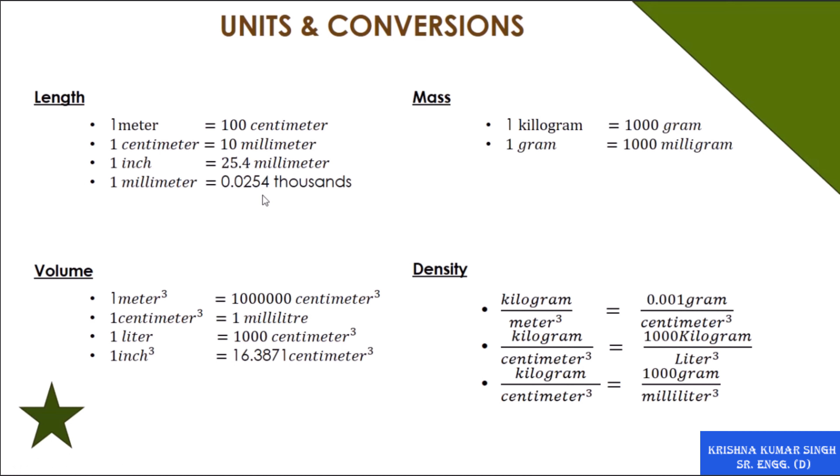These are the base of every industry, but all the other formulas, like pressure, temperature, volume, force, are dependent upon the industry you are choosing, the field you are entering. In the sheet metal industry you will find formulas like bend allowance. If you are entering the casting industry you will find contraction allowance and all the different formulas.

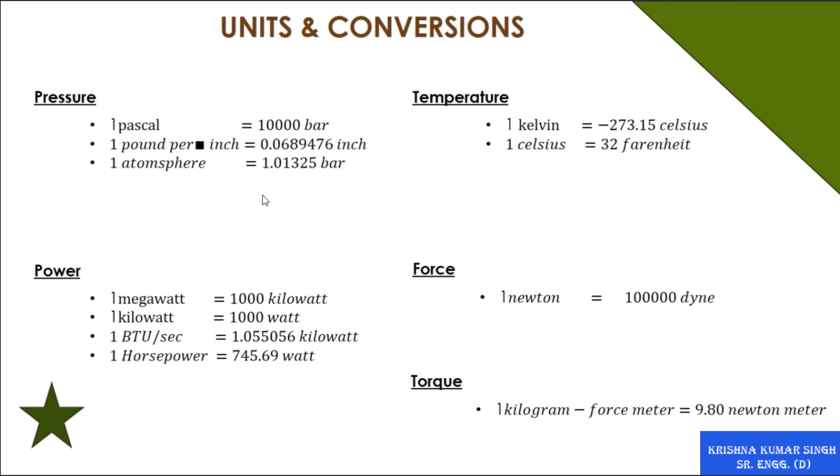So in short, what I mean to say here is that you need to learn the basic formulas first, and then you will need to learn other formulas depending upon the industry you are entering, and these formulas should be accurate. You can see the formulas and their conversions.

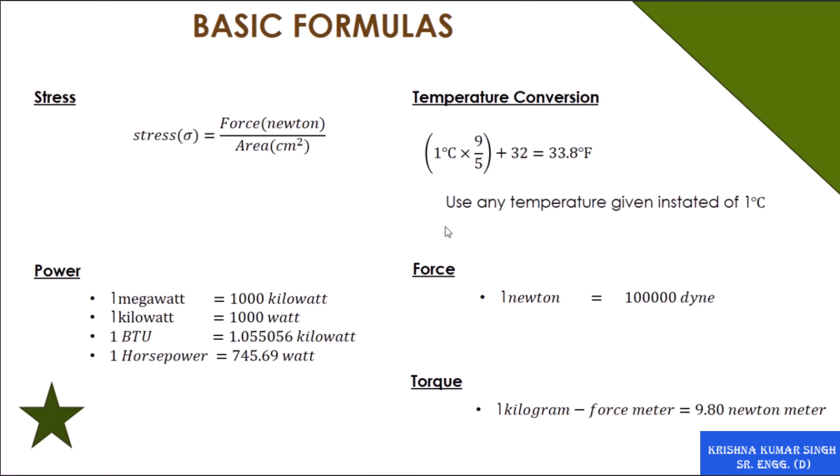Power is needed only when you're entering the machine design branch or you are entering equipment planning. These kinds of numbers you need only when you are entering equipment planning and design. So you need to learn them according to the requirement of your industry.

So let's start with the measuring instruments. First we have the vernier caliper; here it's an analog caliper and already we are using digital. It is used to measure depth, diameters, internal diameters, distance, center distance. And here you can see the least count, but it may be 0.2 depending on the division.

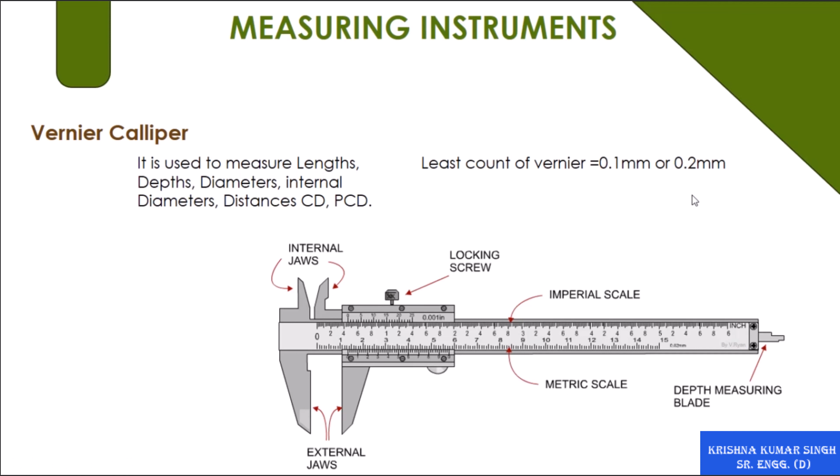If there are more divisions then the least count will be smaller. Actually, as a mechanical designer you need to know the complete use of these instruments and also everything about these instruments. Next we have the micrometer.

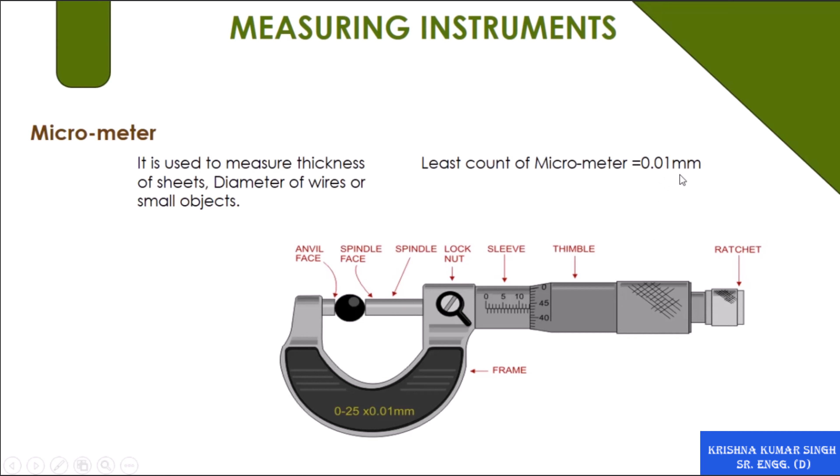We use it to measure the thickness of sheets and gauges and the diameter of small objects. Again the least count is 0.01. If there are divisions, now we can see that there are only 50 divisions. That means 0.01 is the least count.

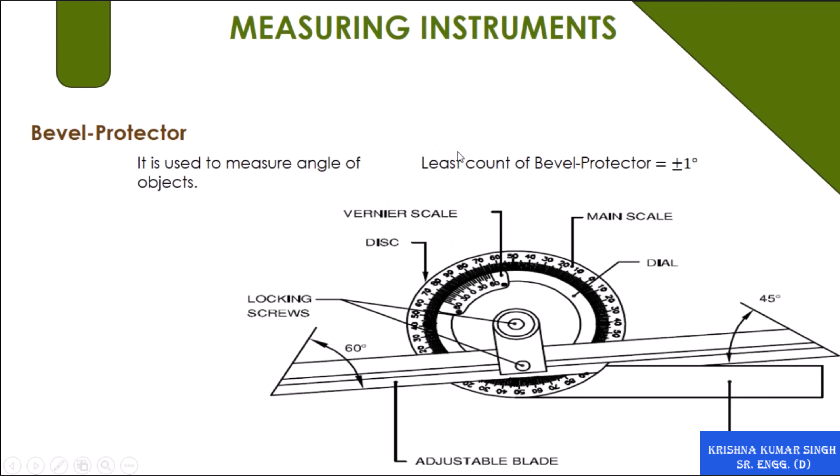You can see the bevel protractor, used for measuring the angle between two surfaces. Least count is less applicable here because it is negligible. The height gauge is very similar to the vernier caliper, but it acts in the vertical direction, so we can measure the distance, the diameter, the spherical radius and the height of the object.

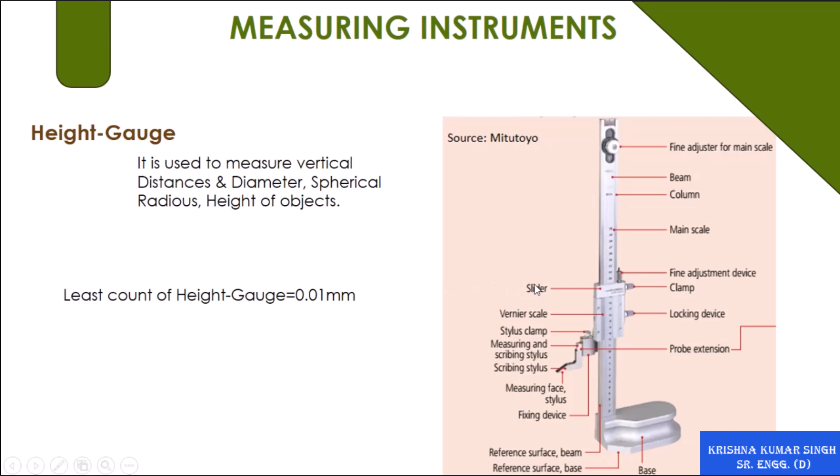Here again we see the depth gauge, which is again very similar to the caliper, and the least count is also very similar. This is the dial gauge. It is mostly used for measuring the roughness of surfaces and for checking, but it has another application. I will teach you how it is used in measuring cylindricity, flatness and circularity.

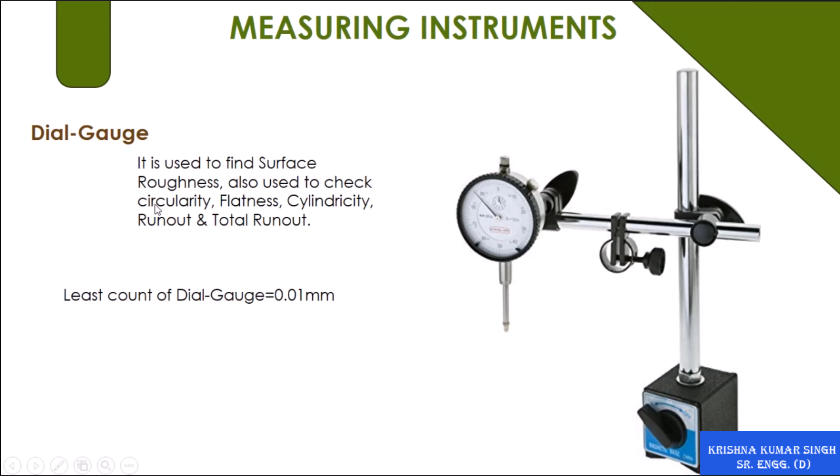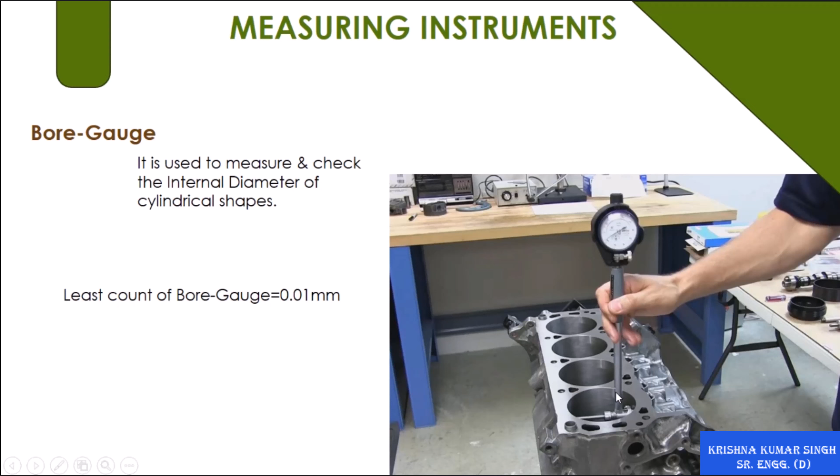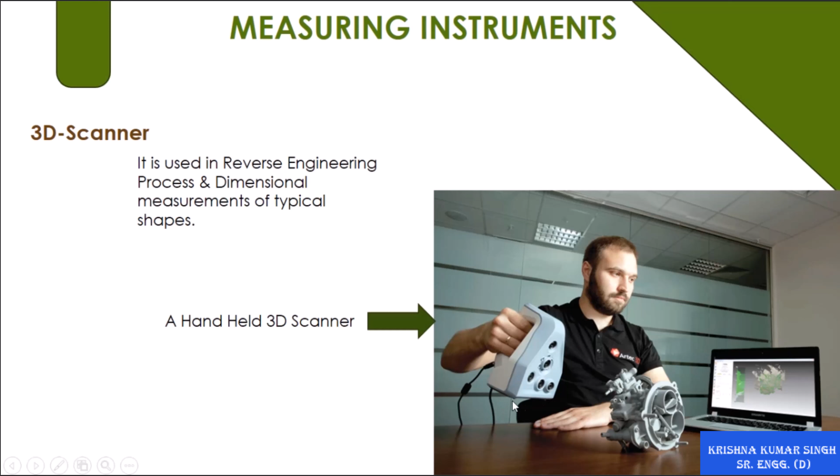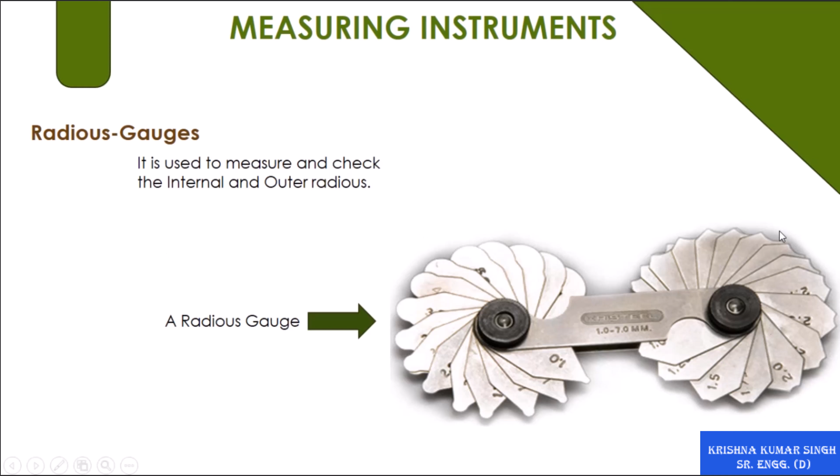This is the latest technique. Next you can see the radius gauge that is used to measure the radius of inner surfaces. This is for outer radius. Here again we see the thread gauge. Actually this is not a normal measuring instrument; it is a checking or detecting instrument.

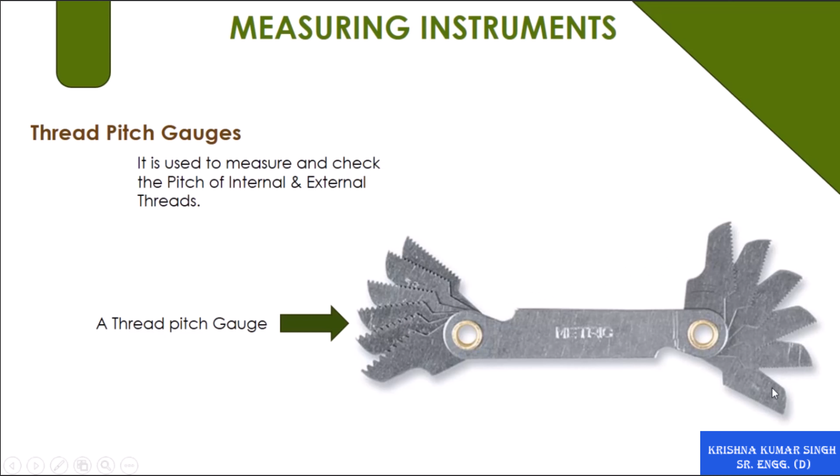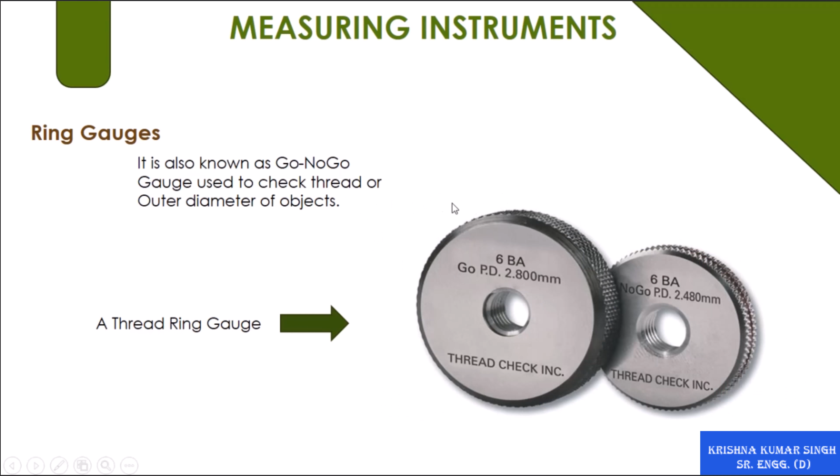We use it for internal threads and for external threads. This is also a quality testing gauge. We use it for checking bits and pieces. These are standardized gauges used for external threads. This is used for internal threads, known as plug gauges, and this is known as a ring gauge.

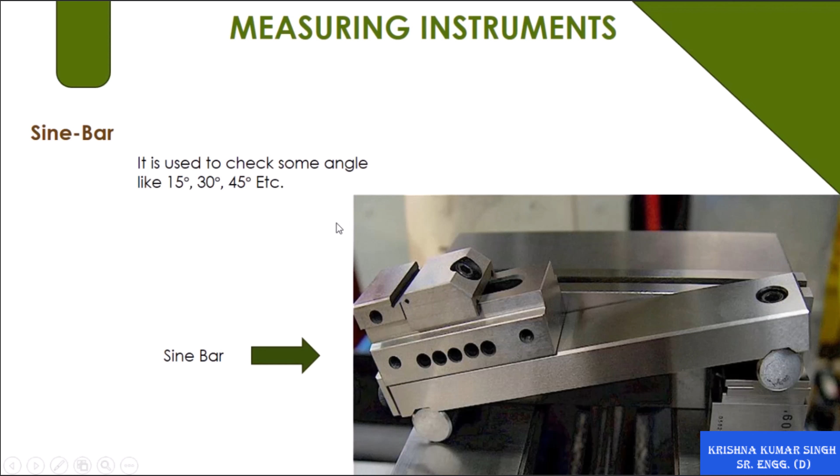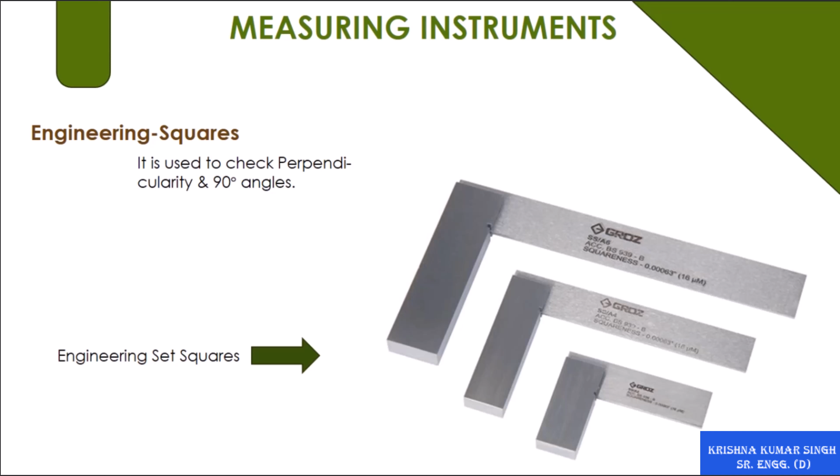See the angle gauge; it's again a quality testing gauge used for checking angles like 30 to 45. Try squares are used for checking perpendicularity. So this is the list of some of the measuring instruments which are very useful. There are other instruments according to the different industries, very valuable in their respective fields. So this is the end of this lecture.